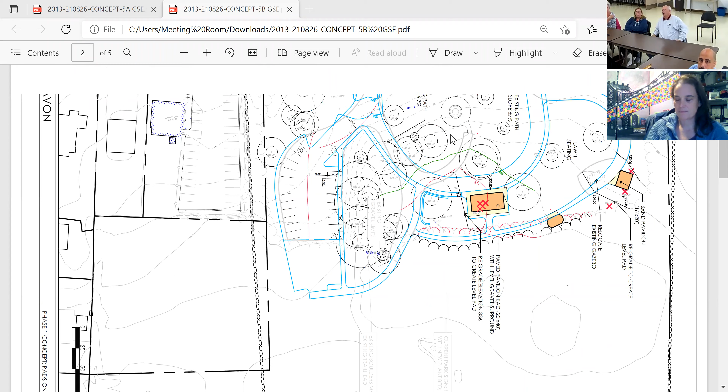Oh, Mr. Terry Edwards. You talked to Terry last week. He said he was sure. Stop in if he could. Certainly. Sure.

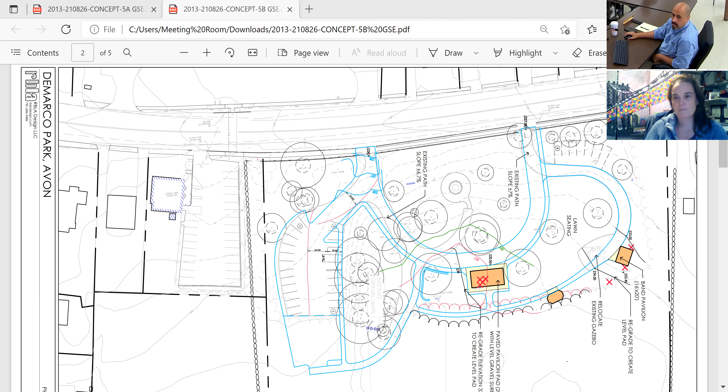Hello, Terry, can you hear us? You're on mute. Maybe not. Shannon, can you hear us? Yep, I can hear you. Okay, just want to make sure.

Just waiting for some sign-ins to go on, but since we have some people in, I'll start off by saying, about a year ago, the Civic Association came and wanted to look at putting some pads down for part of their pavilion that they're raising funds for. The board at the time suggested that we look at the park holistically as part of where we're gonna put the pads, to make sure that it works not just for now but for the future, and as well as making sure things can proceed with any sort of other future expansions if the board looks at it and figures out what they want to do.

So we looked at hiring a landscape architect, and we came across Rebecca Bashard, who has been working with us on a few different variations. We've been sitting with the Civic Association, DPW, Board of Selectmen, and myself to just try to get a broad sense of something that we might be able to do and how it might end up looking. Through all those different variations, we kind of came down with two different designs, but even though they're very similar in nature.

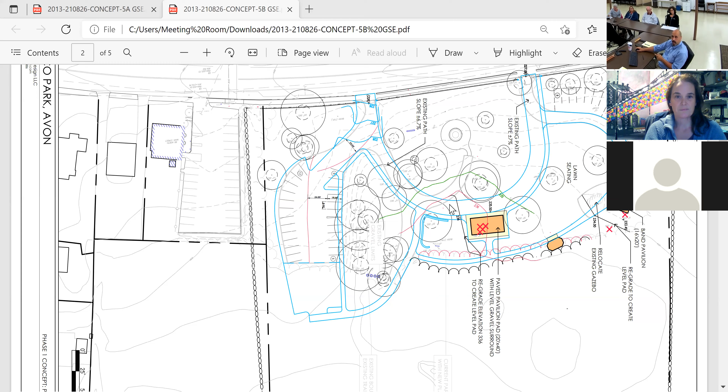Then it comes down to a lot of the part Rebecca did in terms of grading and coming up with pathways to better enhance the park, in terms of being able to walk across the park itself. So a lot of it was—let me just check if the next one will show it. No, that's the page I just passed. Yeah, so this is the one I want.

So here you can see some of the different things that would be part of the improvements. One is at the main entrance where it says 24 feet—right now it's about 16 to 17, maybe even 18. What that will do is allow 2 cars in, 1 car in and 1 car out, having 2-way traffic, where if you go now and you're trying to leave while someone's coming in, it's a 'how do you do, nice to meet you' type of situation.

Also, if you see here, the 24-foot path allows in and out access through this area. This expands the parking quite a bit. I think this is where it currently is. This would allow us to expand a little further.

It's pretty flat, and these yellow pathways are the accessible pathways throughout the park, so you can reach all the different events, as I think they call them. This pathway here would also be allowed for walking.

The water fountain would be constructed so that it's level and accessible through the walking trails. This would be an 18-foot wide path that would be stone dust level so that it's accessible, but also so people coming to the events wouldn't push too far into this, so you could still have level seating areas. Well, here's the lawn seating.

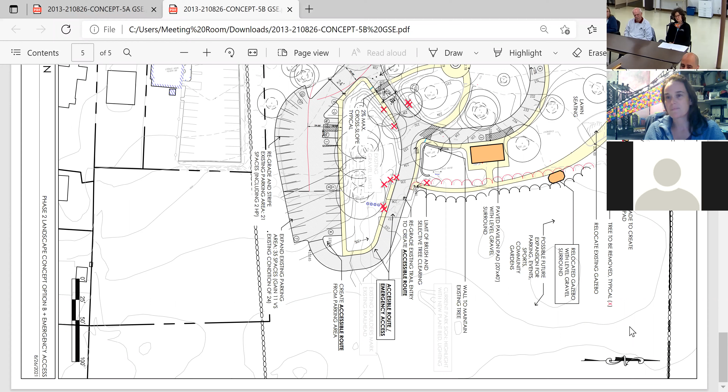Greg asked: all the yellow paths there, are they all going to be hard top so that they're accessible for handicap wheelchairs or anything like that? That is something that Rebecca can take while I get the other one open.

Sure, the intent is that when everything is constructed, the entire park will be fully accessible. The material could be a couple of different options. It could be asphalt or cement concrete pavement, but it could also be stabilized stone dust, similar to what you have out there now, as long as it's firm, stable, and slip resistant.

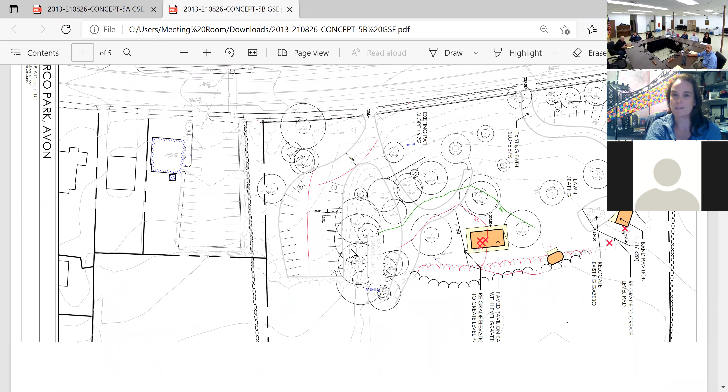We're really concerned mostly with the slopes and cross slopes of the pathways. We just rendered them in different colors so you could more easily see the widths: wanting 5 feet minimum for a sidewalk or pathway versus having 18 feet minimum for vehicular traffic.

So the gray is where we intend you could have the option of having vehicular traffic. Obviously the parking lot you would want 2-way car access, but then we started looking at if you had a food truck event or an emergency need to get cars elsewhere in the park, widening out that main path that's there now.

We did make that a bit wider than existing, and we made sure that it was walkable under a 5% slope as well, so it's fully accessible without any handrails. There'd be bollards there so the cars couldn't just drive through before an event. It'll be blocked off so that people could still walk without fear of a car coming through.

But if you have an event and want to load and unload stuff, you can undo the bollards and have people come in and be able to access it when they need to, so you're able to do that. This would still be the main entrance to the park. We'd have bollards here so people couldn't just come in and drive around, but they would protect those walking in the park.

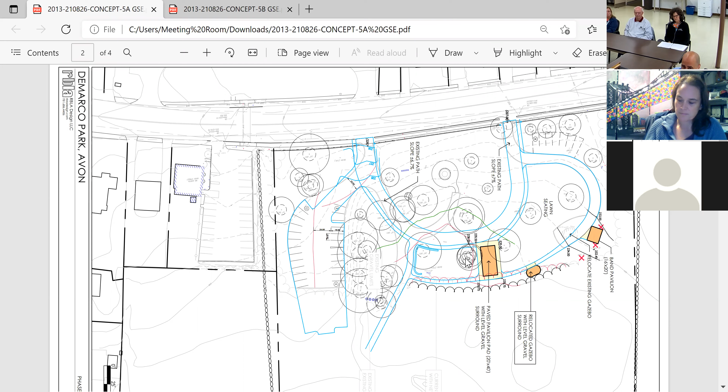These trees here aren't anything particularly worth saving. The birch, he did say, is in good health. If you got rid of the other stuff, the birch could survive. But the birch is already at what I'd call its end-of-life time frame in terms of when a birch normally... it's a senior tree.

Because of that, you couldn't say in 5 years it's going to still be there, or 3 years it's going to be there, because it's already exceeded or is at its life expectancy for a birch. They're not long-lasting trees. So he would have no issue if the decision was made to remove it because of that. It's not something he can guarantee will be there in another 10 years. Where if it was an oak or something, he'd have a different story.

And just so you see here, these are the hemlocks that are back there. All three of those trees are diseased. He said he doesn't even recommend planting those anymore in the state of Massachusetts because of the disease afflicting them right now. They're hard to stave off the disease, and even spraying it every year, whether it makes it survive is still 50-50.

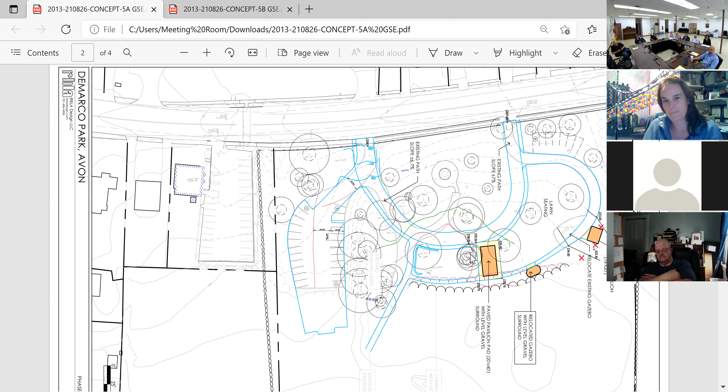And so on this one, I'll go down to this - you'll see the pathway here again, same parking. We'll do some clearing here for the pad that's back here. It's really not much back there.

So prior to coming to the board, we just wanted to sit down and see if there's any other public input on this now. I know you guys have been working on it for quite a bit.

The Avon Civic Association is fundraising for the pavilion. I believe the pads have been mentioned as being an in-kind donation - the cement pads for the town and for the Civic Association to get those up and running.

So, prior to the board approving this and getting everything lined up, they wanted to see if there's any public input on anything. So I just open it to any questions.

I know right now, the idea for anyone who's out there looking is that we're not looking to do this whole project in one swoop. This is really just to get civic associations to lay the land and get their pads in, and then have us work with our open space and rec plan that we're working on to get that finalized, to get other funding sources that could be available to help do this with the trail program, the park grant. It was just awarded to a couple different communities out there. So there's a good amount of funding available once we get our open space and rec plan.

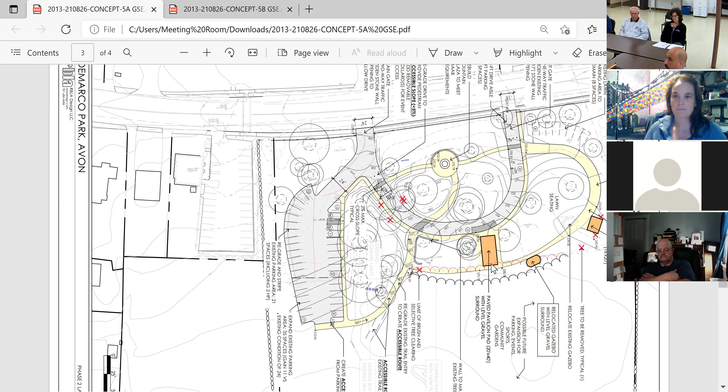So, there are other groups out there that are willing to join with us to make it accessible to everybody in town. I think part of it too is that once we get this laid out, you can figure out where we want lighting. Right now they're kind of put in where we just want to make sure it covered everything. But now that there's pathways here and some lighting here, we could do the next step and get the electrical layout ironed out, so every time we plan it out, we can dig it out properly and get everything mapped out and know where it is.

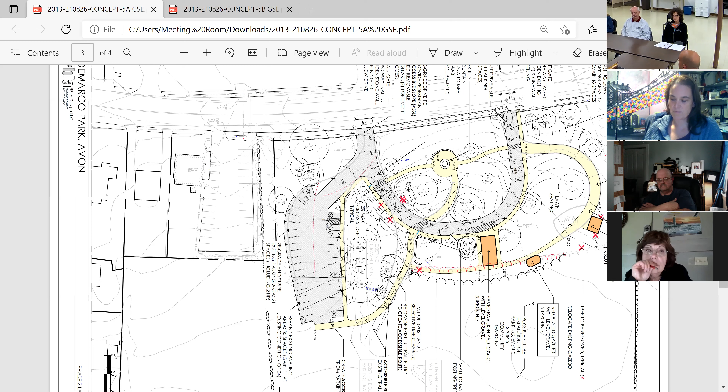We have some of it. Kevin did a lot of that with his electrician, so we know where it is, going from light pole to light pole.

But I think part of it would be— oh, Cynthia is on. Cynthia, I don't know if you're talking to us. Do you have a question for us, Cynthia? You're on mute.

Nope, it sounds good so far. Mr. Marinelli, do you have any questions for us so far? You're on mute as well. No, I don't. Okay.

I don't think Mr. Marinelli dropped off. So we really just want to see if there's any other questions or input from the public on anything there, so that we can bring it to the board for approval. Any other questions from anyone in here about anything?

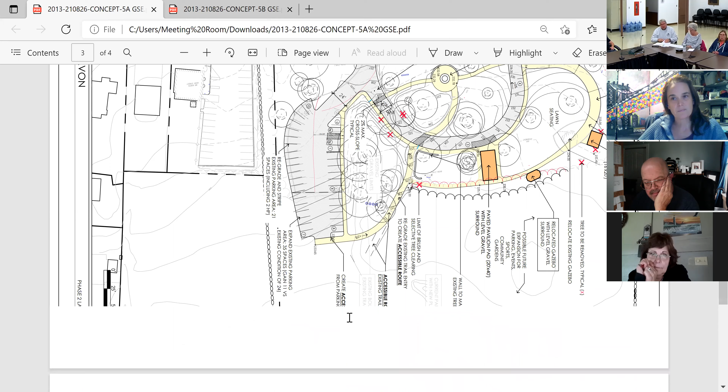So on this plan here, it's got the additional parking, and then it has the path from the backside of the parking lot up to make it accessible from both sides of the parking lot. One of them had, like, the X was actually a road connection, like for the road to be another outlet for a safety feature, that one there.

Like this right here. So I think that one has both the walking, the yellow lines for people to walk, and also that extra lane for traffic flow to get out, or if there's an emergency, they've got to come in and get out.

I think that's definitely a lot more of a grand scheme, and I think that would be something we'd have to look at the costs for. Because I know Terry's not on here, but I'm sure everyone can tell you how much asphalt costs if we do it. But I think this definitely allows for greater vehicle traffic for people coming in and out.

I was also under the impression that was going to be the stone dust type material we have. I really don't think we need asphalt, you know what I mean? I think the less solid surface we have, the better - we don't really have an issue. They don't really plow it in the winter, so it doesn't get torn up. It does need minimal maintenance to kind of drag it out and stuff, but...

That is something we would have to think about in the future, because if it is a pathway, making sure whether or not we want it accessible during winter storms - it may not be the first thing to plow, it might be the last thing we ever do.

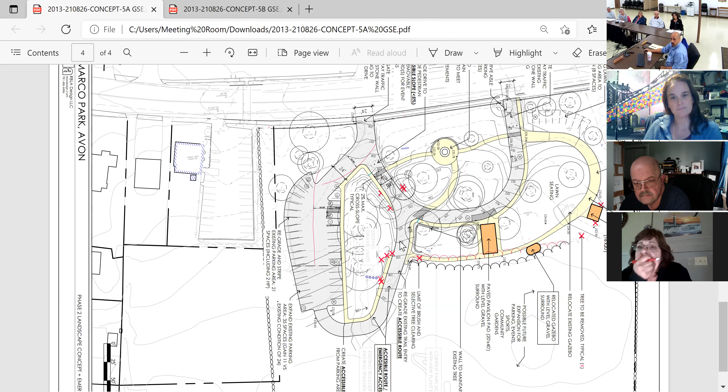And then we can figure out, this would be part B, because this would be what it could cost to do that and lay it out. And this could potentially be the first phase of it, in terms of getting everything done. If we find out the extra road is not that much, we can do it at the same time, then we can figure that out.

This plan and the other plan are basically, the only difference is the drive-through road in the back. So there's 2 versions of each: the shape of the pad, and then whether there's the walking trail. This one is the walking trail with the pad facing the street, and the other one shows the walking trail with the pad turned. Then there's the trail driveway with the pad turned, and the driveway with the pad facing the street, and there's the pad facing the other way.

I was thinking too, if we turn the pad crosswise rather than lengthwise this way, and you put the tent up, would it be interesting to have the front of the tent with the clear covering so people outside can see what's going on inside? You could do pretty much anything, and it's not being blocked off by the fountain this way either, because it's off a little bit. If you shift it over a little bit, it could be, but it would still be higher in terms of elevation than that.

Let me show this. Here's a pathway without the roadway. I think the next one should have the road, and there's pathways that go from the front of the roadway directly to the fountain, so people don't have to make that big hill. They can go north to south from the parking lot towards the fountain, and then from the fountain north again towards the other access road.